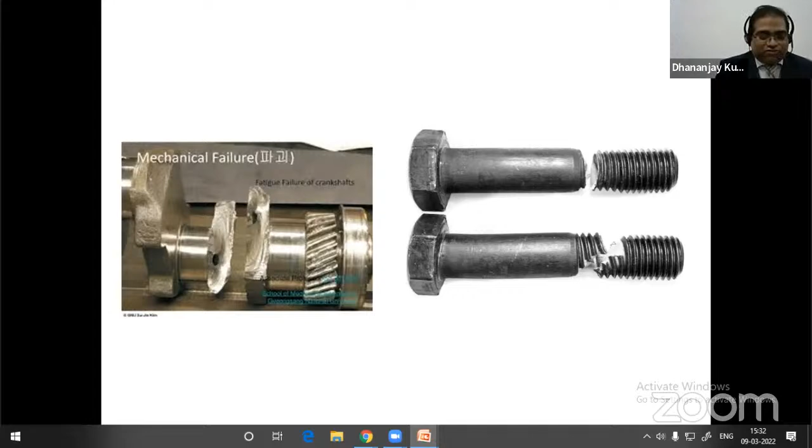And when the stress is induced in the component, if the material cannot sustain the maximum limit, then the component may fail. So first of all, we should understand we are talking about the strength basis. That means when we are going to design a component, we are talking about the strength if we are taking these theories of failure. So first of all, we should understand why we need these theories of failure.

We know that in ideal conditions, if we apply load in a uniaxial direction, there is only one direction of load application. And if we increase that load, at some point our material or component may fail or may get deformed. So fail means not only fracture, it may deform also. That means plastic deformation or permanent deformation occurs in the material.

If we are talking about brittle material or ductile material, both materials are different in nature and both materials can fracture in different ways, can fail in different ways. So for the sake of convenience, first of all, we should do a test on the material to find out the different values, different properties of the material on a strength basis.

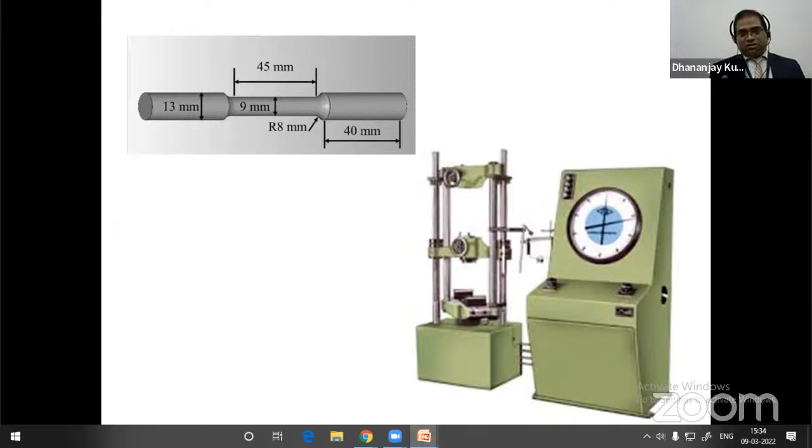That means now it is not a straight line, and at the maximum point we get the value of the ultimate strength of the material, and ultimately our material will fail if we keep increasing the load on the component. This test involves the application of only one load in a uniaxial direction.

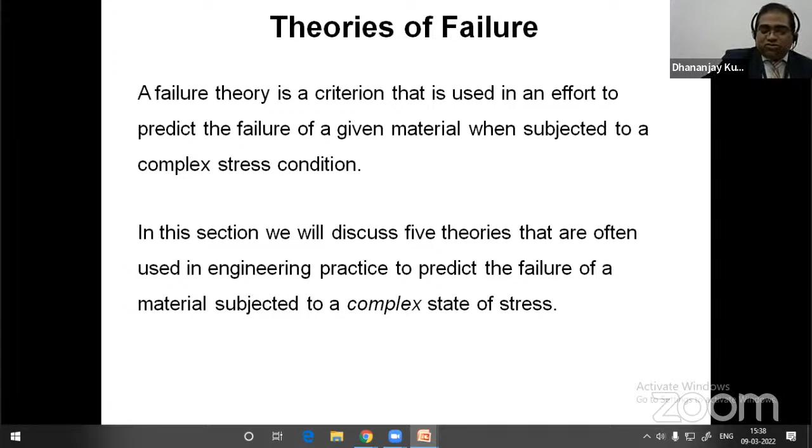So it is very difficult to predict because of which stress or which forces our component is going to fail. That is why the theory of failure came into existence. There are different scientists who gave these theories of failure. Now come to this topic, theories of failure. There are different types of theories of failure.

Different scientists gave the theories of failure, and these theories are also known by their scientists' names. The first one is maximum principal stress theory, also known as Rankine theory. The second theory is maximum shear stress theory, also known as Coulomb, Tresca and Guest theory.

The third theory is maximum principal strain theory, also known as Saint-Venant theory. The fourth theory is total strain energy theory, known as Haigh theory. And the last, fifth one, is distortion energy theory, known as von Mises and Hencky theory. Now let us discuss these 5 theories of failure one by one.

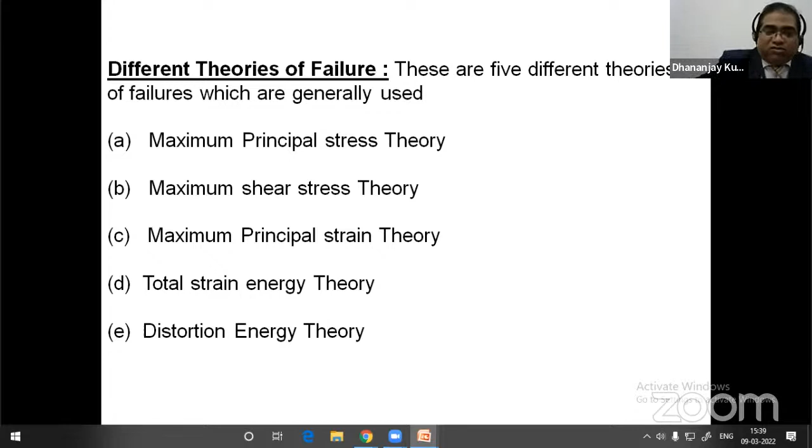Before starting these theories of failure, first of all we have to take the material, make a standard specimen, perform a test on the UTM machine and find the properties of the material, that means the yield strength and the ultimate tensile strength of the material.

Talking about maximum principal stress theory, whatever material we use for machines, the forces may be uniaxial, in a two-dimensional stress system, or in a three-dimensional system. Whatever the system, we can calculate the principal stresses of the component, sigma 1 and sigma 2. These two principal stresses are mutually perpendicular to each other.

First of all, we should understand the statement of this theory. According to this theory, the failure of a mechanical component subjected to a biaxial or triaxial stress system occurs when the maximum principal stress at any point in the component becomes equal to the maximum principal stress in a simple tensile test for that particular material.

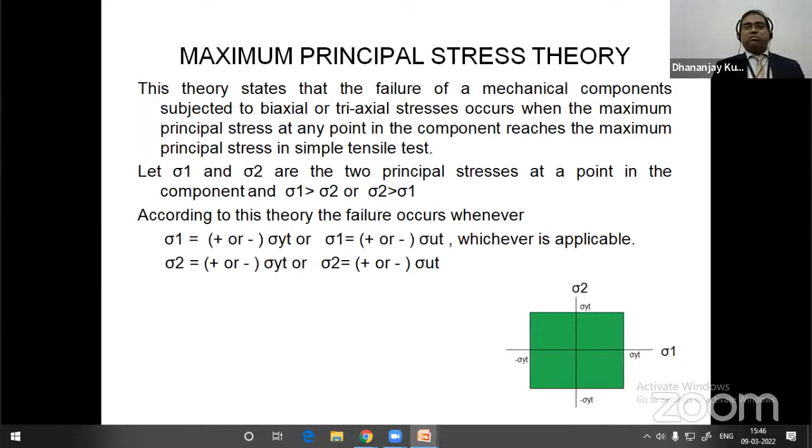Now the next theory is maximum shear stress theory. As we told you earlier, another name of this maximum shear stress theory is the Coulomb, Tresca and Guest theory. So first of all we should understand the statement of this theory.

According to this theory, failure of any mechanical component subjected to a biaxial, triaxial or uniaxial stress system occurs when the maximum shear stress at any point in the component becomes equal to the maximum shear stress in a standard specimen in a simple tensile test.

That means we are considering the same material. Whatever the material of the component, we are going to make the standard specimen of the same material, perform the test, and get the values of its properties.

So according to this theory, if different types of forces are applied on the component, then first of all we can find out the value of the principal stresses. That means sigma 1, sigma 2 and sigma 3. These are the principal stresses, and these three principal stresses are mutually perpendicular to each other.

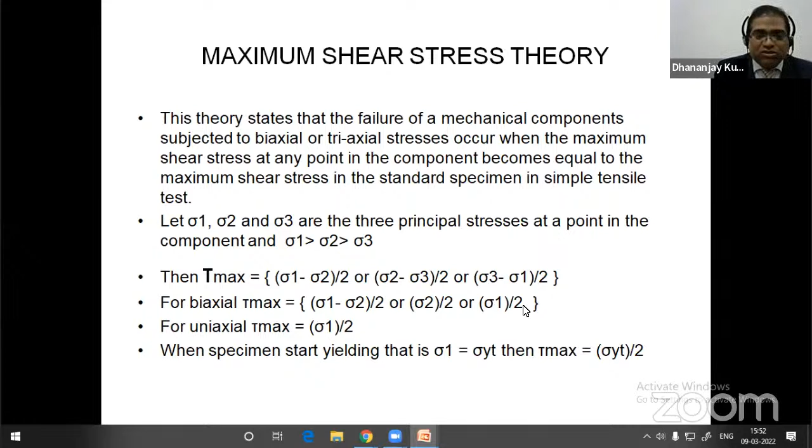As you can see in the previous slide, sigma 1 minus sigma 2 by 2, sigma 2 by 2 or sigma 1 by 2 are the values of the shear stresses. Whichever one is greater, we compare it with the maximum value of the shear stress in the simple tensile test. So from these six equations: sigma 1 minus sigma 2 is equal to plus minus sigma yt, sigma 2 is equal to plus minus sigma yt, sigma 1 is equal to plus minus sigma yt.

And if that value lies out of this region, then our component may fail. That means there may be chances of plastic deformation, there may be chances of fracture.

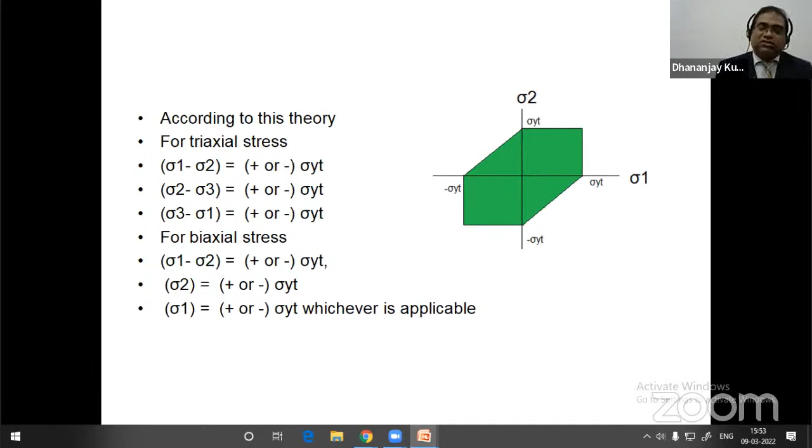Now the next theory is maximum strain theory. The other name of this theory is Saint-Venant theory, so first of all we should understand the statement of this theory. The statement is: yielding at a point in the material begins when the maximum strain corresponding to the complex state of stress — that state of stress may be three-dimensional, two-dimensional, or uniaxial. So whatever the maximum strain corresponding to whatever the state of stress, if it exceeds

the maximum strain corresponding to yield point in simple tensile test. That means at the time of performing the simple tensile test for that particular material, at the time of failure, the maximum strain has to be noted down, and whatever the maximum strain in real condition is to be compared with that value. So if you are applying these theories, we have to calculate the principal stresses of that material, that means sigma 1, sigma 2, and sigma 3. These are three principal stresses which are mutually perpendicular to each other.

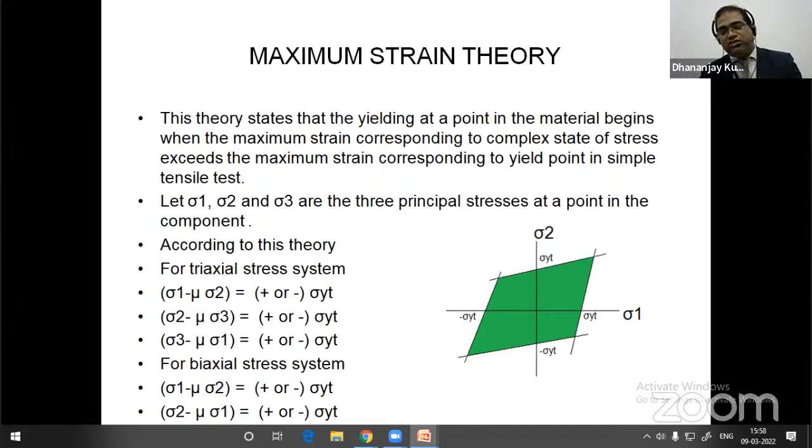So with the help of these four equations, we can draw the safe region. Mu is a constant value, sigma yt is a constant value, and sigma 1 and sigma 2 are the variables; the x-axis represents sigma 1 and the y-axis represents sigma 2. By putting different values of sigma 1, we can get the value of sigma 2, or vice versa. So we get straight lines like this, and the region bounded by all these four straight line equations gives the safe region. That means if the stresses induced in the component lie within it, our component is safe. And if the stresses fall outside that region, then our component may fail.

Now, the next one is total strain energy theory. The other name of this theory is Haigh's theory; Haigh is the name of the scientist. According to this theory, yielding at a point in a material begins only when the energy per unit volume absorbed at a point is equal to the energy under uniaxial state of stress, as in the case of simple tensile test.

Now again, we can say that whatever the forces applied on the component, first of all, we would have to calculate the value of principal stresses sigma 1, sigma 2, sigma 3, which are perpendicular to each other. And for triaxial stress system, we can write the equation sigma 1 square plus sigma 2 square plus sigma 3 square minus 2 into Poisson's ratio into, in bracket, sigma 1 sigma 2 plus sigma 2 sigma 3 plus sigma 3 sigma 1, is equal to sigma yt square. So with the use of this equation, we can get the value of dimensions of the component.

And if you are talking about the biaxial stress system, then the equation comes like this: sigma 1 square plus sigma 2 square minus 2 into mu sigma 1 sigma 2 is equal to sigma yt square. If you are seeing these equations, then in this equation sigma 1 and sigma 2 are the variables. That means if you are going to increase the value of the load, then sigma 1 is going to increase or sigma 2 is going to increase, or accordingly decrease. And mu is the Poisson's ratio, that means it is a constant value, and sigma yt is a constant value since these are the properties of material.

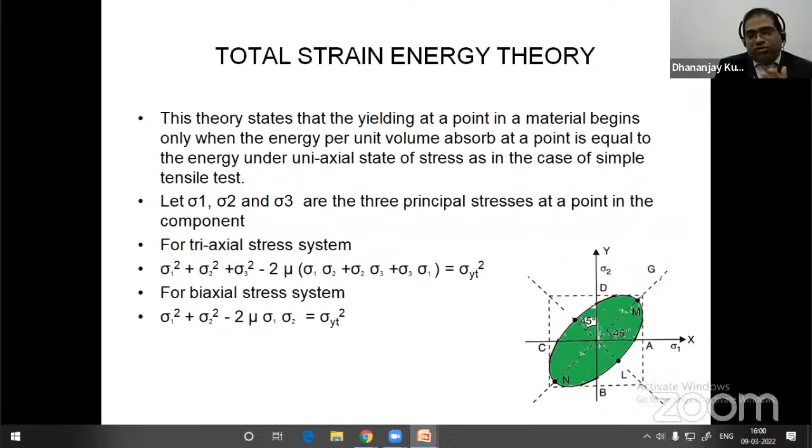So this equation would represent the equation of ellipse, and by putting different values of sigma 1 we can get the value of sigma 2, or different values of sigma 2 we can get the value of sigma 1. So by locating all these points, we can get the safe region. That means whatever the stress is, if that lies in between this region, then our component is safe. And if that value falls outside this region, then our component gets failed.

Now the last theory is distortion energy theory. This theory states that the yielding at a point in a material begins only when the strain energy of distortion per unit volume at any point in the component becomes equal to the strain energy of distortion per unit volume in simple tensile test. And the same thing applies to this theory also. Whatever the application of forces in the component, first of all we would find out the value of the principal stresses sigma 1, sigma 2 and sigma 3, which are perpendicular to each other.

And if we are putting all these values in the equation to find out the distortion energy, the equation for triaxial stress system comes like this: sigma 1 minus sigma 2 to the whole square plus sigma 2 minus sigma 3 to the whole square plus sigma 3 minus sigma 1 to the whole square is equal to 2 sigma yt square. So with the use of these equations, we can get the dimensions of the component, or we can say we can design the component.